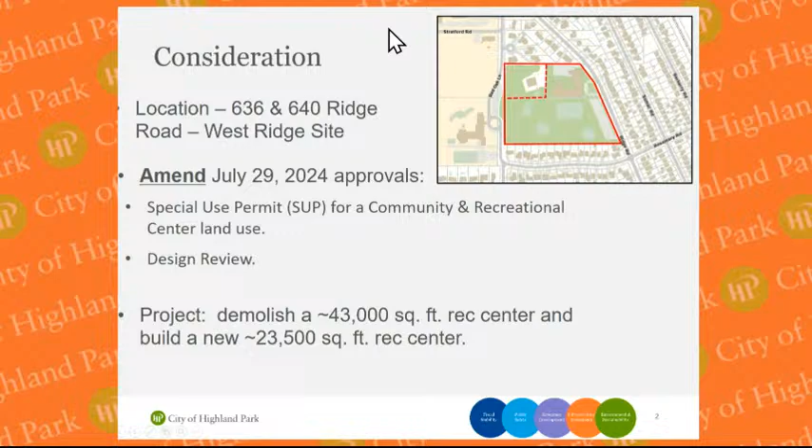There was an approval last July 29th, 2024, for a special use permit for a community and recreational center land use, along with design review. The commission considered this at two of its hearings leading up to that July 29th City Council approval. The project is to demolish the existing 43,000 square foot building on the north side, the rec center on the north, then build a new approximate 23,500 square foot rec center on the south, more towards the southeast section. That was approved last year in July.

Okay, so the applicant, in finalizing their building permit plans, made several changes. So this is an amendment to that special use permit and that design review. I have 3 slides here on the changes.

The first change has to do with the height. This was approved for a height of 27 feet. The proposed is now 30.8 feet, 3.8 feet higher. That is within the PA, the Public Activity Zoning District. This was rezoned to the PA district. That is within the 35 foot height limit. It's just a change to the plans that were approved with the special use permit.

This is a snip from the packet. What's actually increasing in height, it's not the entire building, it's the gymnasium part, which is a sub-footprint of the overall footprint. That is what's increasing in height.

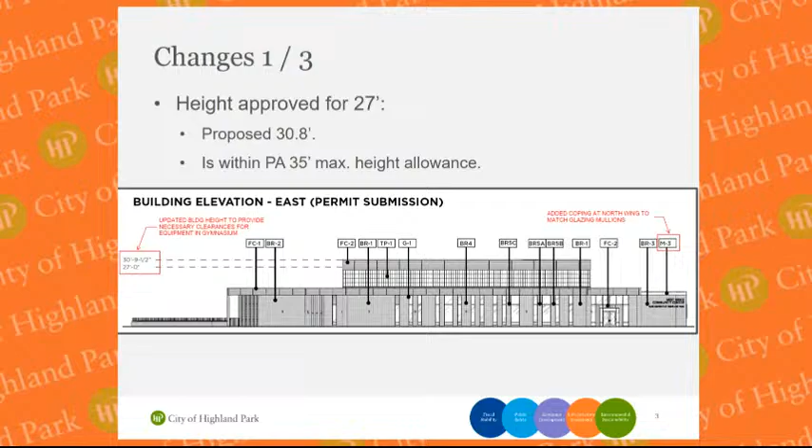I don't believe I have in my presentation the setbacks, though those plans were included in the packet that's posted online. The commission may recall that the building is actually set back considerably from the east property line along Ridge Road and far exceeds the PA zoning district requirement. Again, this is not before the commission because this is a variation. It complies with the PA height limit. This is just higher than what the plans allow for that were approved.

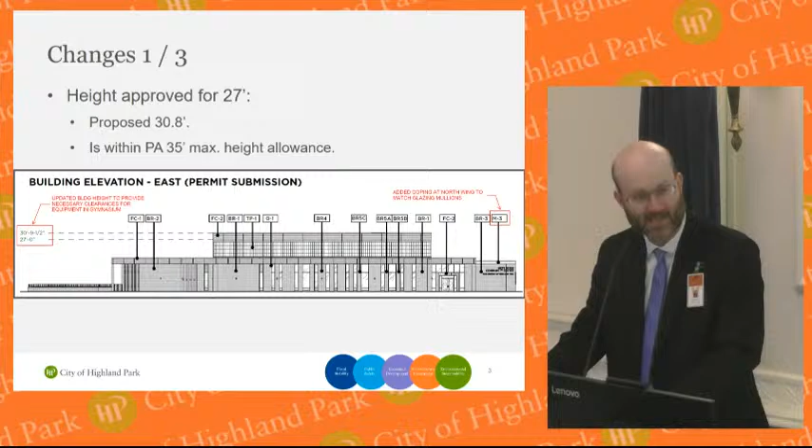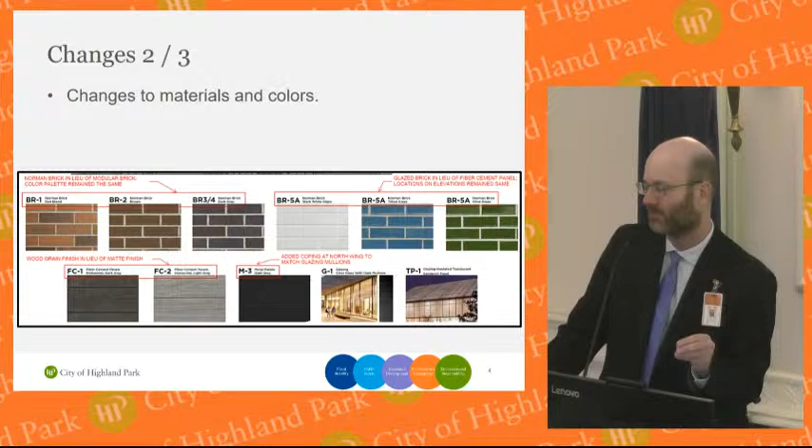There were also some changes made for the materials. This is just one snip I took and put in here. It was an exhibit in the packet where the applicant went through elevation by elevation and had a red box line as to what was changing on each one. If the commission wants me to pull that up, I certainly can, but the entirety was in the packet.

And then number 3, just some bullet points here. There was a traffic circle on the north parking lot. The SUP that was approved last July called for that to be removed. That's actually going to remain. That needs to be there for fire and emergency access.

There's an update to landscaping. That's actually more, they're doing more. They're doing 1 additional shade or ornamental tree and 15 shrubs. That doesn't require commission approval. That's more, that's just back here, just as an FYI to you.

There's also changes to the bollard lighting. They're changing from a wired to solar lighted bollard. Bug rating is 000, that means no uplight, no glare, zeros across the board. And there's 3,000 Kelvin correlated color temperature. That's what the city always encourages and asks for.

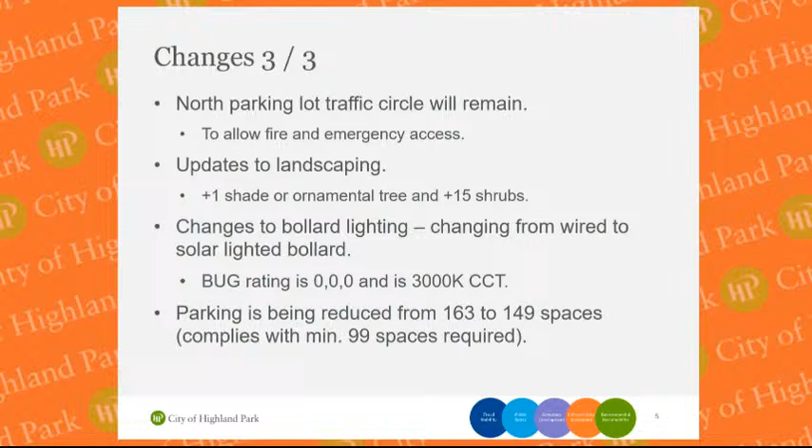That's what's being provided. Parking is also being reduced, but it still well exceeds the 99 minimum spaces that are required. Again, I want to emphasize no variations are requested. This is a change to the final development plans that were approved. The height consideration being number 1, and so that's why this is before the commission.

No public comments have been received. At the request of the applicant, there are findings of fact recommending approval at this meeting that were included in the packet. So if the commission is ready to make a recommendation to approve, that could be done this evening. This is a public hearing, should take testimony from the applicant and take public testimony as appropriate. Thank you.

All right, does the commission have any questions for staff?

Yes, Commissioner Henry. I just had a question about the lighting. Is there any significance other than the change between going with hardwired lights and solar powered lights? I'm just speculating, I imagine the solar powered would be more sustainable because it's powered from the sun, but those bollards are actually set back along. So there's an east parking lot along Ridge Road, and those lights are actually set back along, would be the west curb, so to speak, of the parking lot. So it will still comply with the photometric requirements.

We're presenting all the changes, Commissioner Henry, holistically. Since it's here for the height change, we're just letting the commission know in general all the changes.

I'm not quite clear on the turning circle. Is it, because I couldn't tell from the plans, is it still detached from the other parking lot, or are those going to be combined somehow? That I couldn't tell on the plan. They're connected. So if you're talking about the furthest north parking lot, which to an extent exists today, and then how it goes over to that traffic circle, and then it kind of comes down to a parking lot for that separate building in the northwest quadrant, that they connect, sir.

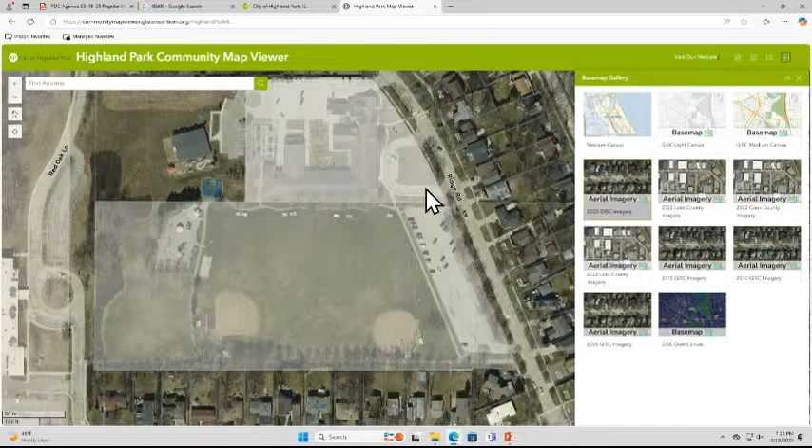Oh no, I think that's being removed. But I think that was always part of the plan from last year as well. Right, this one's being removed, and that was approved last July, and that's still the case today. Forgive me, I didn't know which one we were talking about. No, see, that's why I pulled up the map, that's where I get confused.

Okay, any more questions for staff? Do we have any public questions for staff about this part of the project? Or if the applicant wants to provide testimony. I'm gonna ask them next. Does the applicant wish to provide us some extra testimony?

Hi, good evening, I'm Eric Reisinger with Holabird Root, the architect for the project. Okay, and I will need to swear you in. Do you swear to tell the truth, the whole truth, and nothing but the truth? I do. Thank you, and next, Barbara Dixon.

Landscape architect, do you swear to tell the truth, the whole truth, and nothing but the truth? I do. All right, go ahead.

So I'm happy to answer any questions that might come up, but essentially I think it's been covered very well in the layout. We had bid day savings that were very favorable, so going to some of the glazed brick and change of materiality really added to the benefit of the building for long-term durability.

Great, thank you. Do we have any questions from the public for our applicant? No questions from the public. Do we have any questions for the applicant from our Plan and Design Commission? No, all right. So what we would be looking for here is...

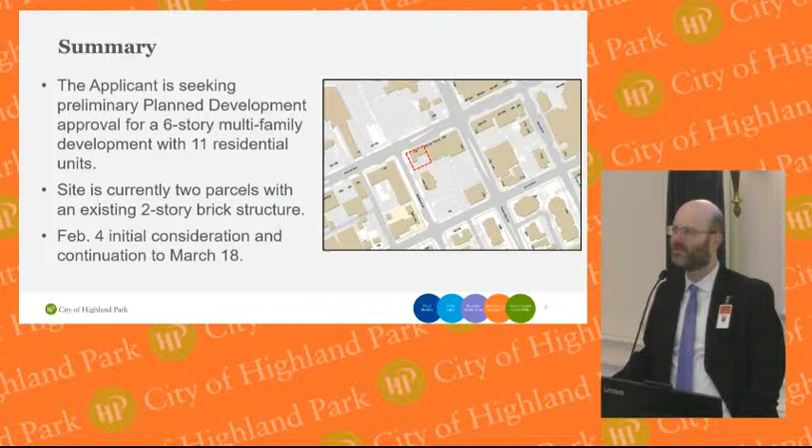That's what PUD is, for a multifamily development at 734 Central Avenue. The applicant is seeking preliminary planned development approval for a 6-story multifamily development with 11 residential units. The site is currently 2 parcels with an existing 2-story brick structure. This was initially considered on February 4th by the Plan and Design Commission, and now we are back as this was continued to today, March 18th.

Okay, so a couple things just to run through. So the applicant submitted a new packet of exhibits with either revisions or just new things.

So I'm just going to run through that briefly. One new item submitted was a narrative on sustainability and resilient design, provided in part to respond to the city's environmental checklist.

The applicant also made changes to renderings and the street elevation exhibit. Additional renderings were provided that included depiction of rooftop structures for what's proposed, and the adjacent bulk of buildings was filled in, in bulk form. I'll just indicate the garage door for this building had changed colors.

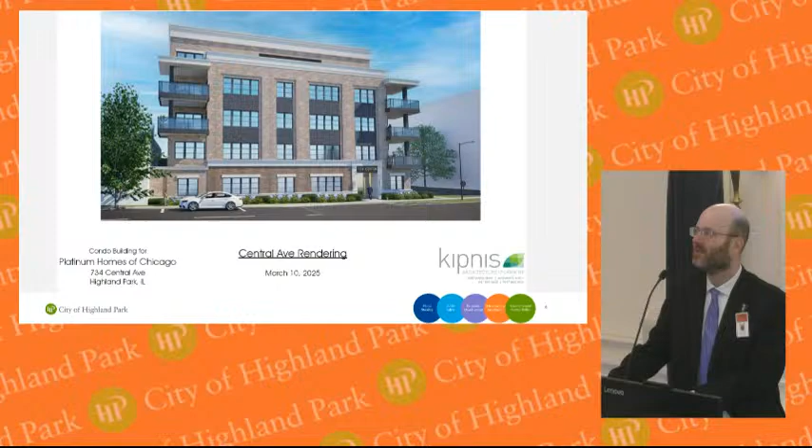I think I put 3 or 4 of these, but the applicant's exhibit had, I think, 8. I'll just run through these real quick. So the applicant added kind of bulk or massing here.

So that's to the west across McGovern. That would be to the east. And this is on Central Avenue looking south at the building that's proposed.

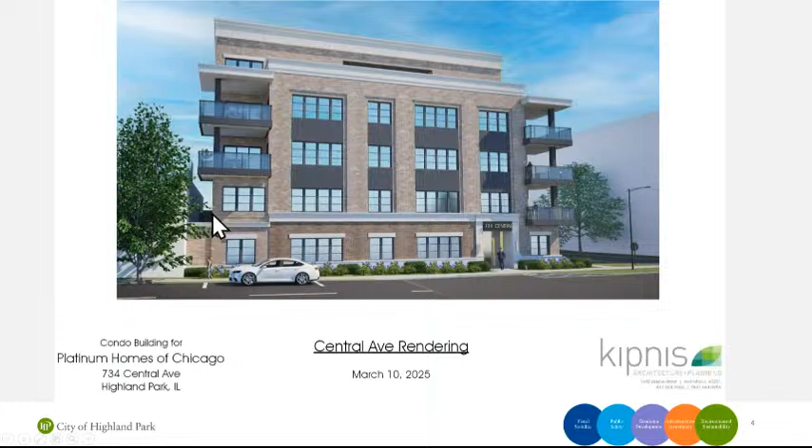I do want to point out that the building goes up to the lot line, a 0 setback here on the first floor for the garage. And then on this side of the building, there's a 5-foot setback running all the way up.

This would be from the northwest looking southeast. Again, the applicant provided this updated rendering, showing bulk or massing of adjacent buildings.

And then this is now on McGovern. This would be if we're on McGovern, looking northeast towards Central.

And then what the applicant did on this side, there's a revision here. There's a 5-foot setback, a ground level 5-foot setback. Of course, when you get back here to this door, this wall is a 0 setback line and runs all the way up. And then here there's a 5-foot setback.

And of course, there's building code implications with that. That's why the applicant laid out the design this way, where you have windows here, and here you do not.

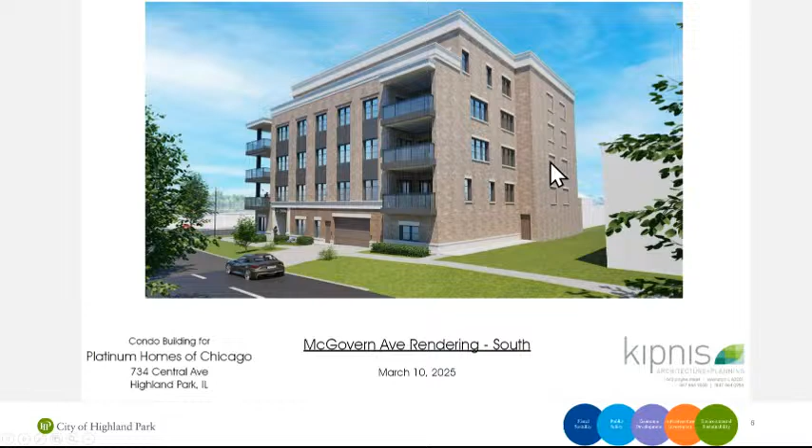And then I think this is the last rendering I took. Like I said, there were 7 or 8 in the packet. This is just an aerial view, or a bird's eye view.

This hopefully gives a better image of the rooftop structures. Because remember, in this district, you can have 4 stories. And so the applicant has a 5th story with 2 residential units that stepped back. And then there are elements of 6th floor stories up here.

Okay, so then for the architectural plans, I'll run through just a few of these real quick after this slide. So there's a turning exhibit for the interior first floor garage that has been provided. That was another comment from the commission from February 4th.

The facade had revisions to it. I just talked about the new 5-foot setback that was added to that south property line.

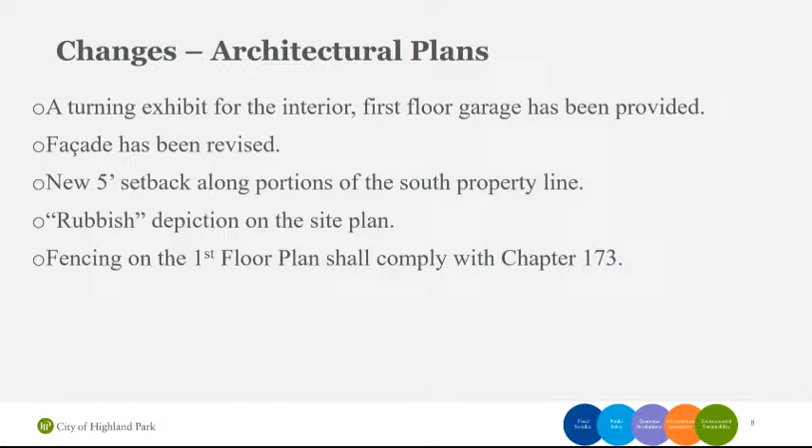There's a rubbish depiction on the site plan along the west. I'll point that out - that'll have to be screened or fenced as appropriate. Also, I believe on the site plan there's going to be fencing on the south property line. Such fencing shall have to comply with Chapter 173 fence requirements.

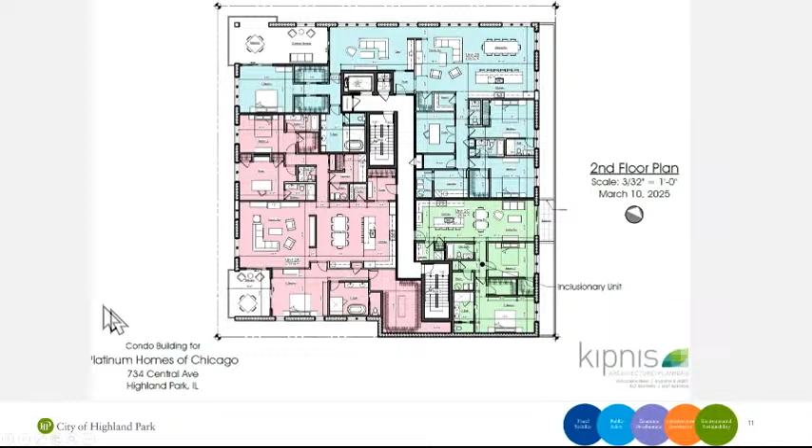On the left is the roof plan that was on February 4th. On the right, the one with red revised, that's the roof plan before the commission now. You'll see that the applicant added rooftop mechanical in these corners, and struck a rooftop stairwell access here.

And you can't read it on this resolution, but you'll see that the applicant modified the elevator. I don't believe there's going to be elevator access at the top - I think it cuts off. It's just like a bulkhead now. So those were the changes to the roof plan.

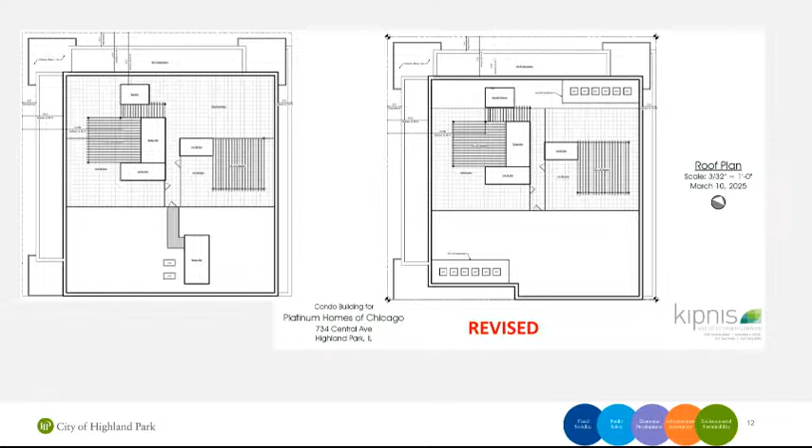So on the roof plan, the applicant depicts AC units. The elevator access to the roof has been removed, but the bulkhead is still modified. One stairwell was removed - that was in the staff report. Any mechanical equipment must comply with the sound regulations.

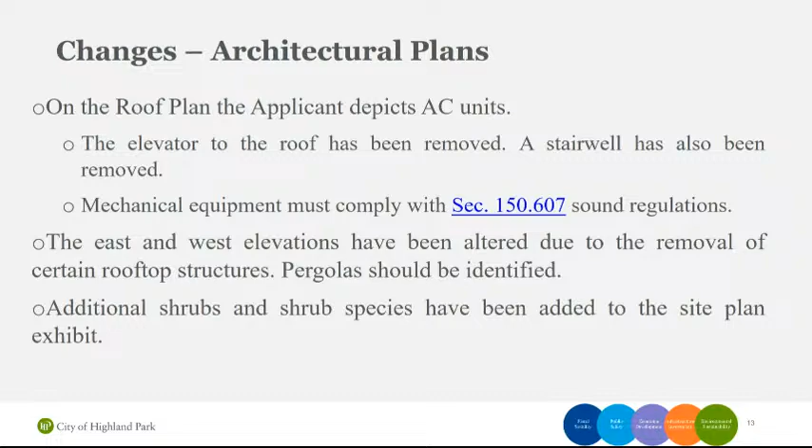Yes, we ran through those landscaping changes, so it was updated. There are 3 different species proposed, and then there was an increase in the shrub count. So the shrub count increased by 26.

Hold on one second. Yeah, so there's no relief needed there. No relief is needed for the shrub count. They're 22 in excess. Now there was talk about the trees, and of course this property, they're doing, in this zoning district, there's the Article 23 overlay.

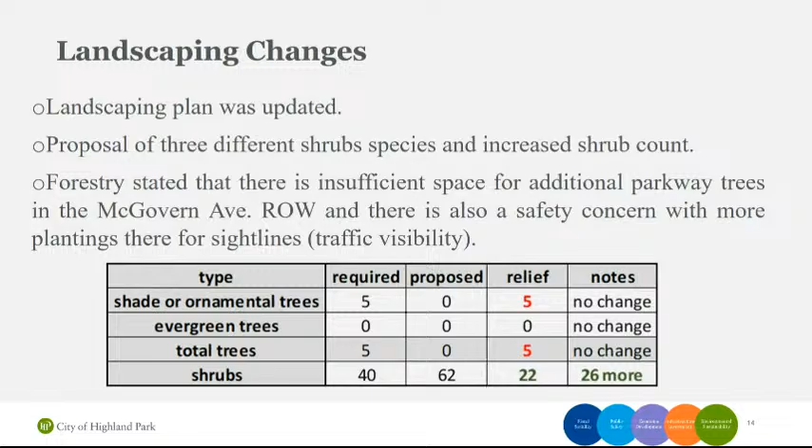And so they actually have to have a setback. It's like that build-to-between zone. And so they're meeting the 5-foot setback. And as they depicted it, those are shrubs, not necessarily room for trees there.

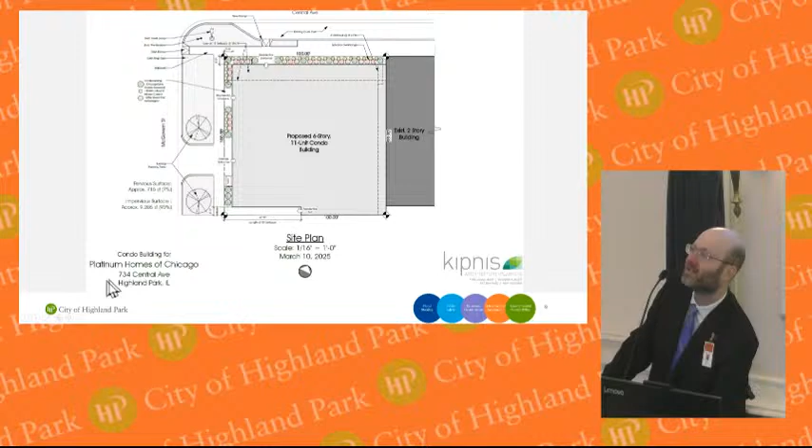And so I know the commission talked about, well, can they put trees to the west in the McGovern right of way, or for any of the right of ways for that matter? Well, we put that question to our city forester, Ben Miller, and I'm paraphrasing him here, but the exact words were in the report. The answer is no. Forestry doesn't support that. There's insufficient space for additional parkway trees, and there would be a concern with putting those trees in there for traffic visibility reasons. So the question was asked, and that's the feedback from our city forester on that.

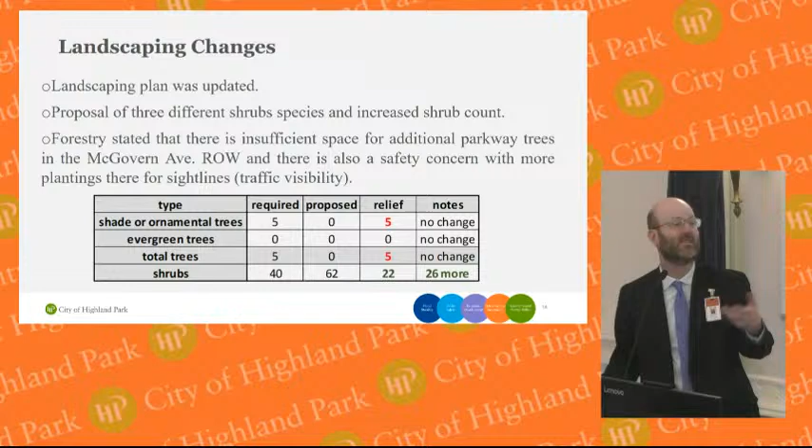So changes to the modifications — I've got 2 slides here. This slide is what's changed for the modifications that are requested. The next slide is what stayed the same, because I still think that's important to remember.

So in terms of height relief, this zoning district allows a maximum of 4 stories and 51 feet. I'll just point out that one of the exhibits, and I apologize, I wasn't able to ask the applicant this in advance, but one of the exhibits was 7 inches different, so the applicant should just clarify if the relief is still 68.5 feet or if it's going to 69 feet.

The stories are the same, but obviously we talked about how what's on the rooftop has been modified, so there's context behind that. There's a modification to section 150.520M for construction to the property line on the east side, the 0 setback. That was relief at the prior meeting as well. I just don't believe that was in the staff report, so we just want to make that clear.

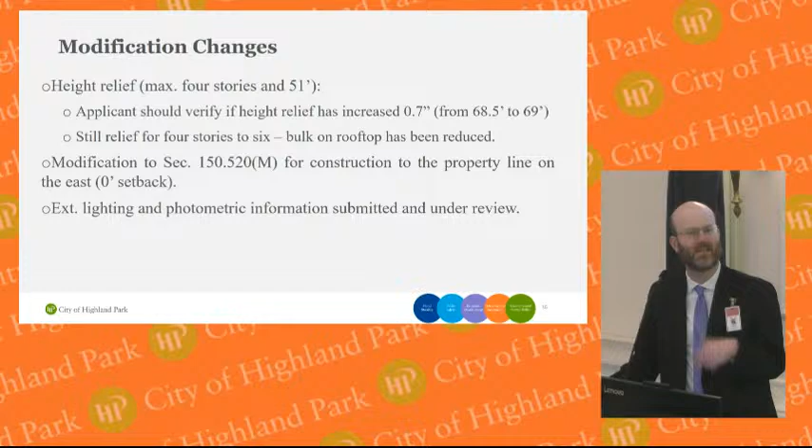There's a PUD requirement where a new building is supposed to be at least 15 feet away from any new or other existing building. And then finally, exterior lighting and photometric information was submitted by the applicant. That came in yesterday, that's still under review. I did distribute that, I will make sure that gets in the packet for next time, and there will be review next time for that.

Okay, and here these are just the modifications in public benefit. There are no changes to this. This is just a reminder to the commission that they're also asking for traffic visibility requirements since this is at a corner. We did discuss that, and we discussed the distance last time.

They still need to verify the transparency and blank wall requirements, though I did see numbering on the photometric plans — perhaps that may respond to that. I just did not have time to completely review that as it came in yesterday. The aforementioned landscaping modification applies for the trees, not for the shrubs, then that response there to that section. And then the public benefit — that's what was proposed, and they did not submit a change to that.

I think I'm almost done with my presentation, just a few more at most. So the Housing Commission — this is an update. The Housing Commission reviewed this preliminary review at its March 5th meeting. 1 inclusionary unit is proposed and $148,320 payment in lieu for the fractional 0.8 required units. There's a little more bulk to this in the report, but long story short, Housing Commission recommended 5-0 in favor, preliminary approval of this inclusionary housing plan. It'll come back again on April 2nd to the Housing Commission.

Oh, that is my presentation. So again, standard recommendation: the commission should consider the changes, take testimony from the applicant, reopen the public hearing and take testimony from residents, and then either continue or direct staff for findings of fact for a future meeting as appropriate. Okay, thank you.

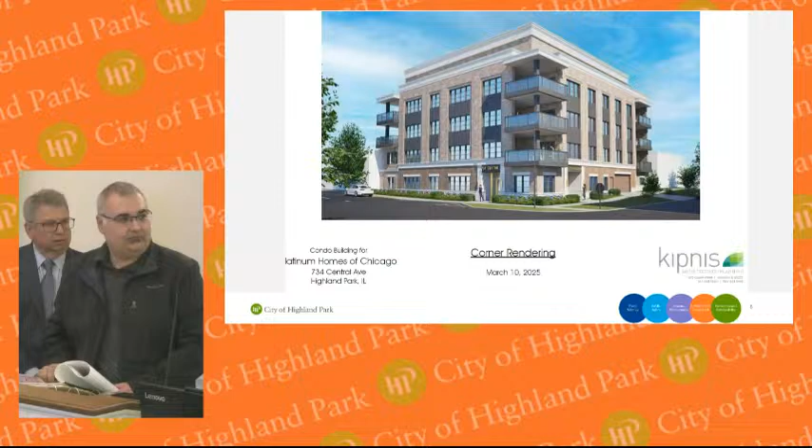Commissioner Imchuk: I have a question about the elevation, the rendering. It looks as though you can't really see anything on the 6th story with the revisions made. Is that true from all angles of the building? It depends on how far you come back, but that perspective is elevated up a little higher, almost at the floor level of the 2nd floor. So we're trying to make it clear that you can't really see a lot of that floor, so it basically reads as a 5-story building from the street, because of that setback.

As mentioned, the only elements on the 6th floor are the deck and the stairwell huts, and I believe there's also a pergola up there. So obviously there's really not a lot of bulk on that 6th floor, it's just for access, basically in the vertical.

I have a question on the stairwell huts. What material are you using for that? In that elevation it shows white, but in other elevations it shows the same as the building material, which could be brick. We haven't talked about that specifically. I'm assuming it will be a masonry material, because that's what's structured underneath to support it. It will be visible at some points, right? If you're driving around the city, you'll be able to see those stairwell huts. If you get far back enough, you probably would, though it would be difficult to see even from across the street on the sidewalk. I'd like to know what that material would be.

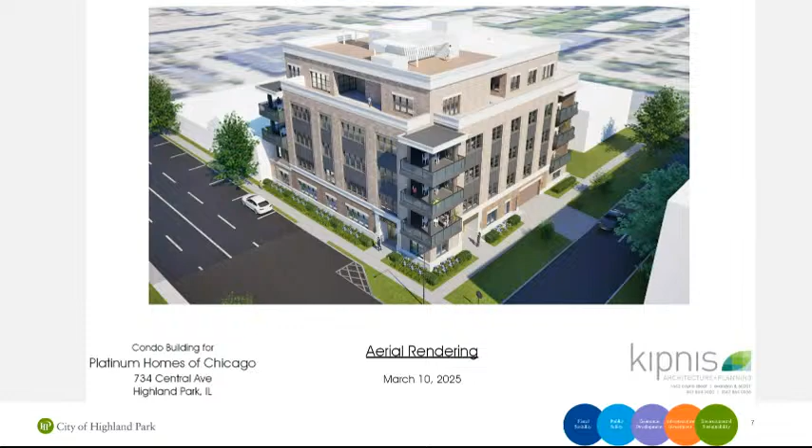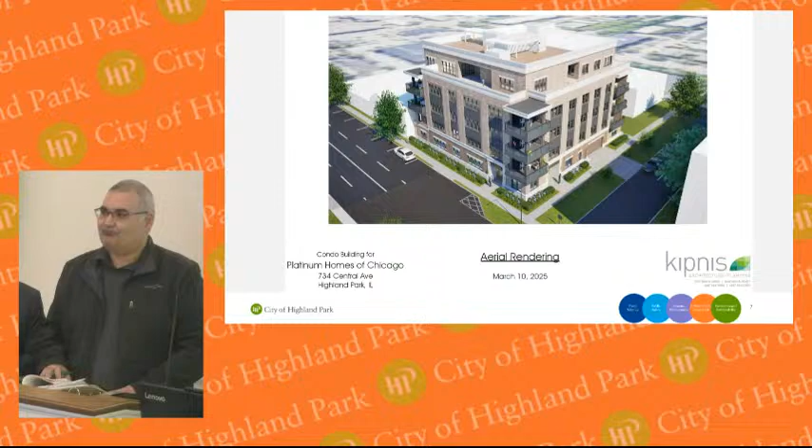I did provide Carl with some brick samples. One of the changes was at the ground level, we added a contrasting brick material. So one of those is the brick for the main building, and the darker one would be what we're proposing for the ground level, just to give a little contrast, and we'd probably have a darker mortar to further emphasize that contrast. Those changes were made in response to comments we received last time from the design division. It anchors the building a little bit better with having that base around the streetscape, or the street elevation.

Mr. Fontaine: I just wanted to point that out. Thank you for that additional variation in the facade bricking. But in terms of the roof and the stairways, is it something you can do in terms of having it clad with the same type of brick as the superstructure above the first floor? I think that makes sense, something the commission might want to see.

Any comments on that comment? Any comments on?

Are you able to comment on the 68 feet 5 inches versus the 69 feet, or do you still have to go back and look at that? We're asking for the 69 just to round that number up, because as you can tell by the rendering, those stairwells aren't fully detailed yet. I want to make sure I have enough room to play with. We might add a cornice or some other detailing that will bring that up a little bit. I think 69 is going to be doable and realistic.

If there were to be additional plantings within McGovern, the forester's concerns were limited to just this parkway to the west. The forester was not in favor of additional plantings there because they stated there was not sufficient room, and that in this area there would be concern for traffic visibility. He was not referring to the building itself.

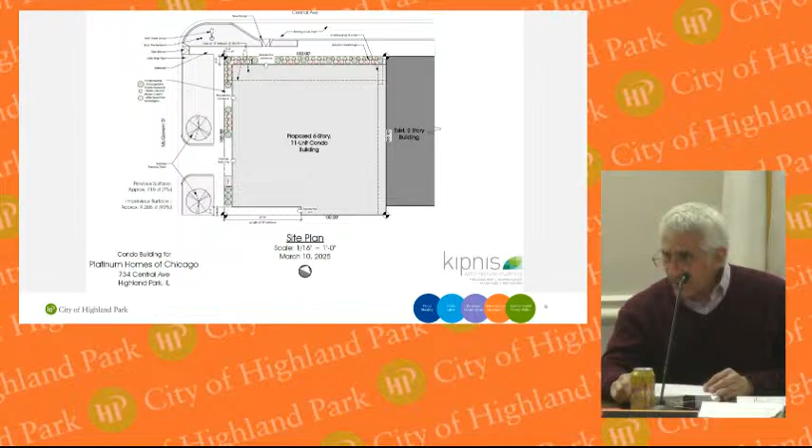Okay, I understand, it was the plantings, not the building. But it's all part and parcel of the development. Yeah, and obviously we're going to comply with the forester's request.

Do we have any comments from the public? Oh yes, sorry, Councilperson Littlewer.

I just want to make sure I have my questions answered, though I'm not sure they'll get answered at the council level. This is actually for staff as well as for the applicant. I'm glad you cleared that up about the forester, Commissioner Henry. But as far as the city engineers and staff, there was no problem with visibility, especially on the north side on Central, at that corner there, where it's a right-hand turn coming out from McGovern to Central. I just wanted to ask about the actual building, not about the plantings, in terms of visibility.

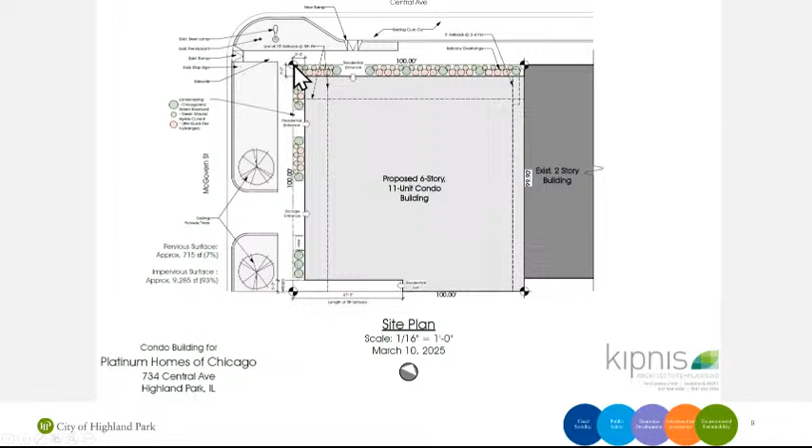Would you like me to respond? I can respond. If I remember correctly, you might have been absent at that meeting - I missed one meeting. So at that meeting, the requirement is a 25 by 25 foot traffic vision triangle, and per code it's measured at the property line, so it'd be 25 feet down here and 25 feet this way. I used the survey as well as GIS.

Now granted, this is not the code requirement, but there's context, right? So we try to look at what makes sense, what's the context. If you use that 25-foot requirement and the curb, it's actually something like 25 or 30 feet here, and down is fine. So if you only use the parkway, the building will not be in that traffic visibility area.

In terms of the engineering division, no, they did not comment on that. I'll add, I actually referred that question to the police department as well, and they did not have comments. Perfect, that's exactly the response I'll need for city council. So that's one.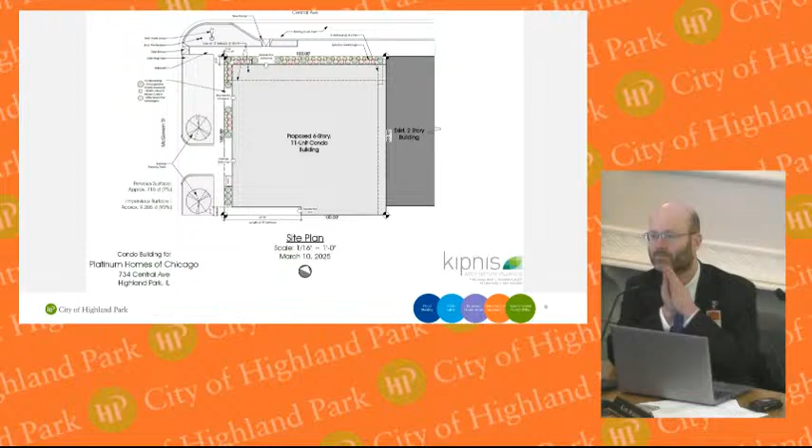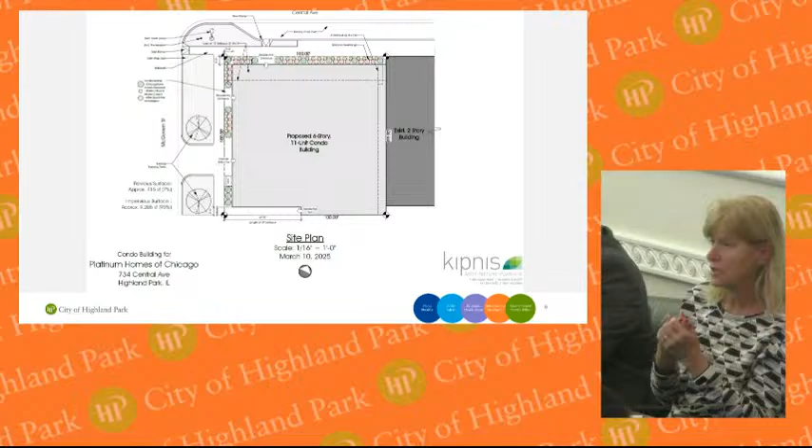The second one was there were several pictures showing the neighboring building, which is about the same height, which alleviated some concerns. But I guess my question is, I didn't see the rest of the neighborhood in the packet, and I'm wondering how that looks as a street, not just as those two buildings. I tried to look at it in the packet, but I'm not sure there was any rendering to that effect.

We have just massing models of the neighboring buildings to the east and the west, I guess, the McGovern house as well, but we don't have them in the elevation. The only study we did was comparing the height to the McGovern house.

We had a discussion at the last meeting with regard to that specific issue. The discussion really involved the fact that the properties to the east are in the B45 zoning district, which allows for 5 stories. So when we discussed this - and the board members can remember - if those properties are redeveloped, they can go to the same height as our building, assuming the lots are not undersized like ours, as a matter of right. They don't have to do it, but correct me if I'm wrong, it's because they'll be governed by the underlying zoning, which is the B45, whereas we were governed by B44 because our lot was undersized. Currently, where Shavitz is and those are 1-story buildings, but if they are redeveloped in the future, they have the ability to go to the same height that we're proposing here.

Perfect answer, thank you very much. I apologize that I didn't have that information. Thank you, I had one more question.

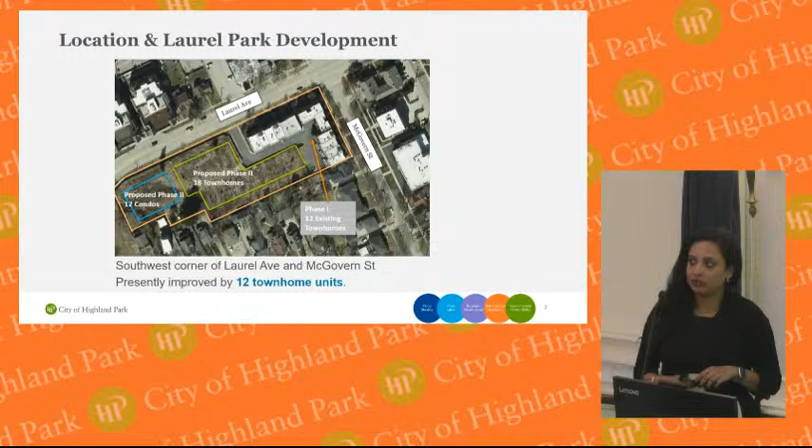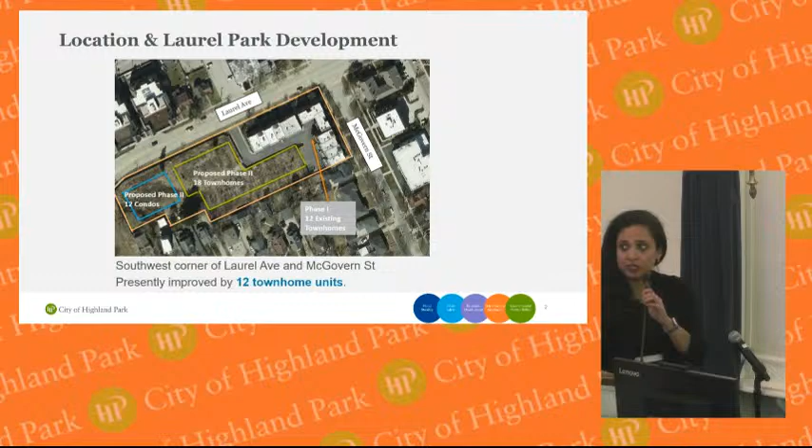So getting into Laurel Park development, where is this located? This is located at the corner of Laurel Avenue and McGovern. Right now we have 12 existing townhomes. This was improved, which you can see as phase 1, which was completed. What's proposed now in phase 2 is 18 townhomes. Can you see that in yellow? So those are the 18 townhomes. If you walk and drive by, if you look through the fence, you will see existing foundations for those 18 townhomes. In addition, they're proposing in phase 2, 12 condominiums on the corner, which is outlined in blue.

So what are the considerations before the Plan and Design Commission? As part of those 12 existing townhomes in the Laurel Park development, in 2006 there was an ordinance number 23-06 which was passed, and a 2006 development agreement. So this needs an amendment to that agreement. It needs a special use permit in nature of a preliminary as well as a final plan development. It requires design review. Of course, the Plan and Design Commission has the final authority. A plat of subdivision, because again, we have those 12 existing townhomes with individual owners, and now we're getting those as part of phase 2, the 18 townhomes and the 12 condominiums.

And it also requires a preliminary and final inclusionary housing plan. Just to give you a heads up, this has already gone to the Housing Commission for a preliminary inclusionary housing plan.

So I'm just going to go into each of the sections. For zoning, we need to bear in mind that as part of the 2006 development agreement and the ordinance that was passed, there were some variations that were already granted. But again, this needs to apply to the present code and the same variations need to be considered. So I'm going to go over the ones that require variation for zoning. The first one is the front yard setback. Presently, they are proposing the same thing. Like I told you, there are existing foundations for the townhomes, nothing is changed, and I believe the footprint is the same.

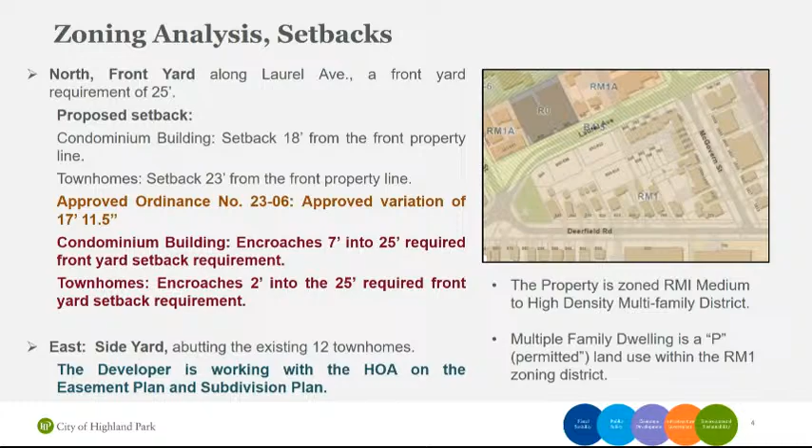I want the developer to confirm that because they are proposing a drive aisle now, and I got a new revised plan yesterday based on the HOA's feedback. So I don't know if the footprint is changing and if those front setbacks are going to remain the same. But for now, I can tell you that whatever was approved as part of 2006, nothing is changing. As for the east side yard, we're going to confirm that. They're working with the HOA and seeing how this is going to be subdivided. Once we get the finalized plan, we will be able to let you know how much that east side setback is. I'm going to show you the site plan.

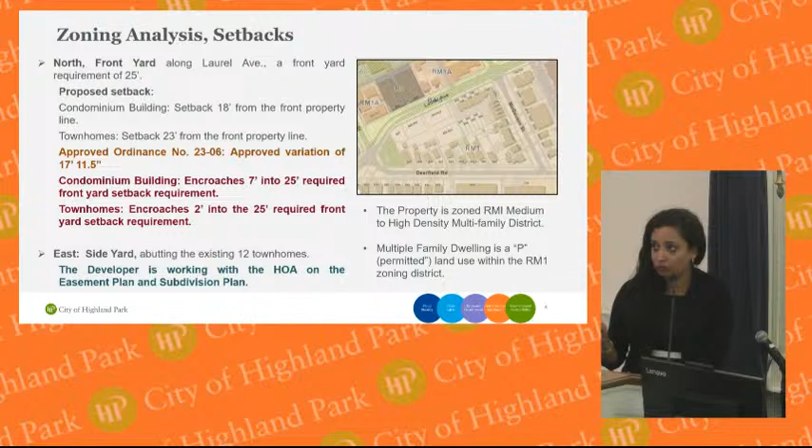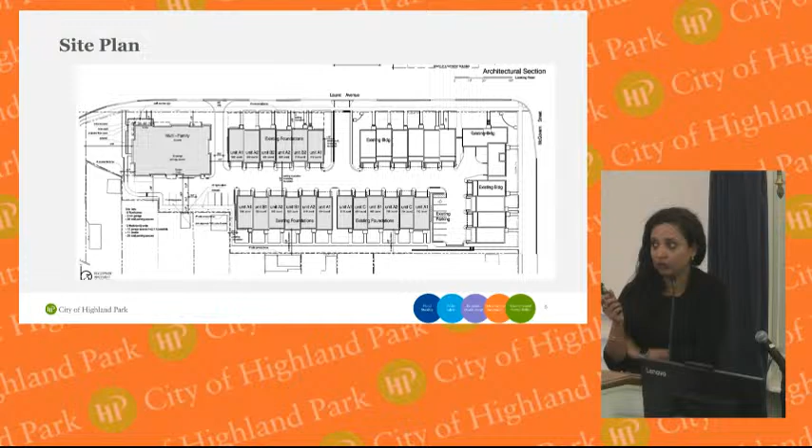So what I'm referencing now is the west and the south meet code. The west is towards Hickory Lane and Laurel Park. The north setback, which is the front setback, requires a variation, and the east, if you look at it, backs up to the existing HOA.

So for zoning analysis for density, if you did see my report, I did mark that it actually required a variation. After discussing with corporate counsel, I just wanted to give you an update that the PUD is considered for the entire lot for density. This was improved by 12 townhomes, but it was approved for a 42-unit development, which comprised of 12 plus 18 townhomes. Those are 30 townhomes and 12 condominiums. So this was approved for 42 units.

Coming to height. What we have here is they're proposing a condominium building of 52 feet in height, and the townhomes are going to be 38 feet in height. If you look at the ordinance and the 2006 development agreement, the approved variation was 39 feet. However, the new variation required is going to be a little bit more, which is 17 feet more.

I'm going to have the developer come up after this and speak, because it's a more contemporary style, and each floor has a larger height, so it amounts to a greater overall height. So this would need a greater variation.

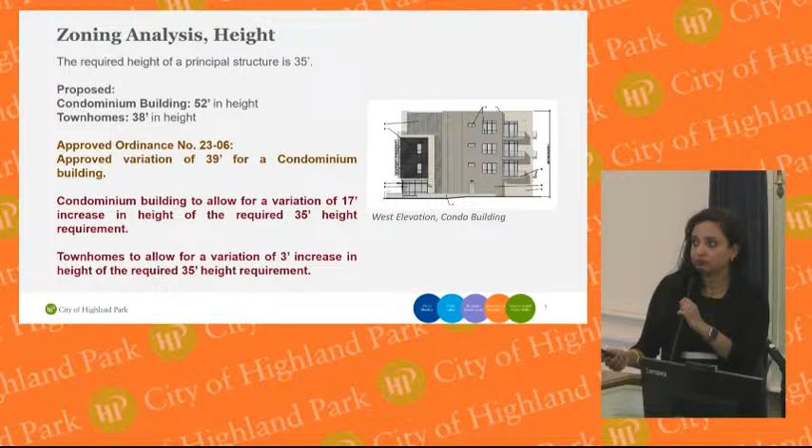And then lot coverage. The lot coverage remains the same compared to whatever was approved as part of 23-06, which will be an 11% increase. However, I want to note again there is a drive aisle that's been added between the condominium building and the townhomes, and that will change the coverage. We received that more recently, so this percentage will increase.

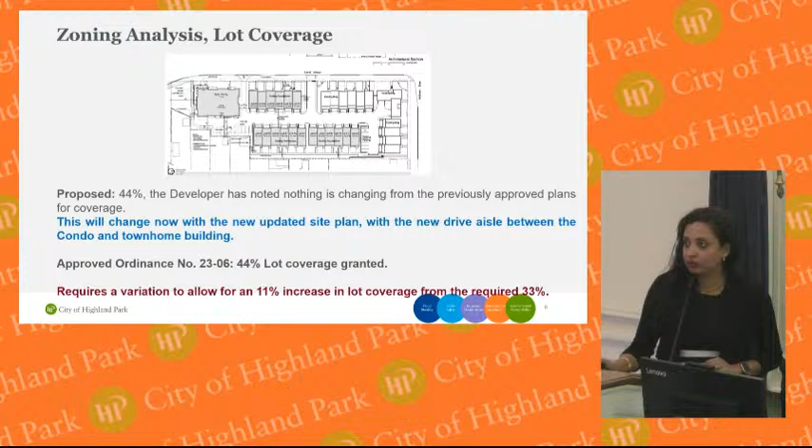Signage. They would need relief for signage as well. This is considered a projecting sign, similar to the one Albion has, if you've seen that. This will be baked into the PUD as a sign package, and as long as it meets the intent of the projecting sign, which needs to be 12 feet above grade and also be artistic in nature, we've confirmed with the developer this is not an illuminated sign.

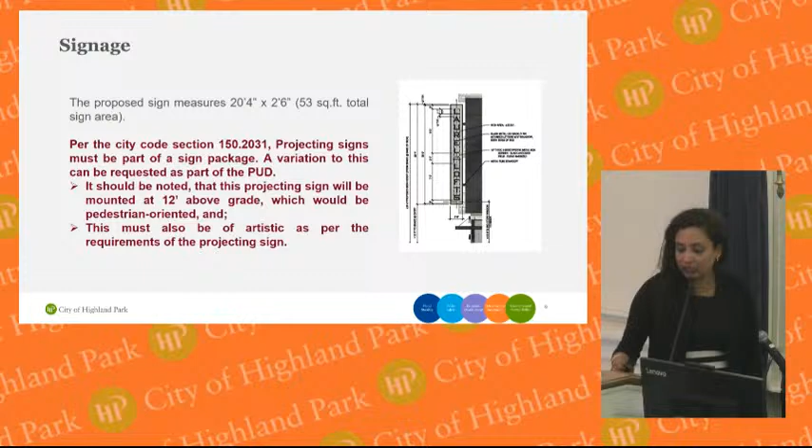Coming to commission meetings, just giving y'all a heads up. Laurel Park Development has come before the Housing Commission twice, and I'll tell you why it went before the Housing Commission, but I want to note it was on February 5th as well as on March 5th.

One of the most significant amendments to the 2006 development agreement includes reducing the required 7 affordable units on site to 4.8. This is why they went before the Housing Commission first, to see if the Housing Commission was okay with this. They are okay with reducing those 7 affordable housing units to 4.8. This took place on February 5th, and I'll get into the details in the subsequent slide.

In addition, this went for a preliminary inclusionary housing plan. So any change from that 7 affordable units to 4.8 would need an amendment to the 2006 development agreement with variation, and there are departures that will be required with the new proposal. But please note the developer is working with staff before this goes for the final inclusionary plan to the Housing Commission on April 2nd.

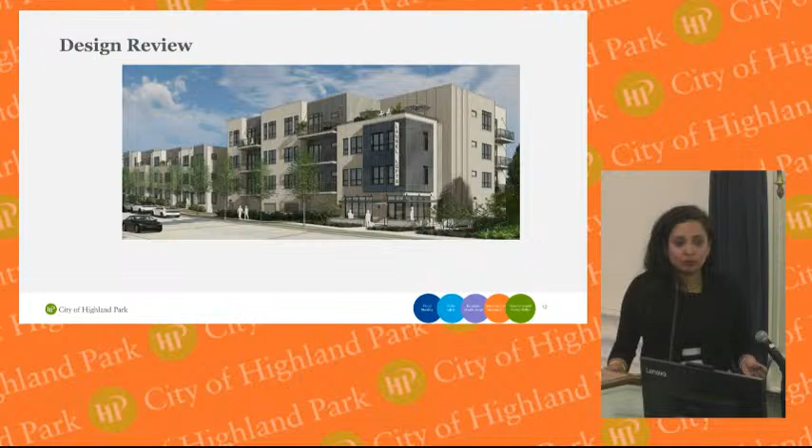Coming to design review, one of the things to note here is this is more of a modernistic contemporary style architecture. Staff looked through the findings, if you see in the report, and didn't find any sort of concerns except when it comes to compatibility with the existing. If you got a chance to drive by and see this, the existing townhomes off of Laurel Avenue are traditional, sort of Greek style with a pitched roof and columns, versus a more contemporary style.

So I leave it to the Plan and Design Commission to see what needs to be done if there is some type of transition that you want to see. But standing alone by what it is, I mean, it meets the design review intent. It's not monotonous, and it has its own character and style.

Oh, thank you for placing that picture up. Yeah.

I just want to note, when I mentioned public comments, there was an attachment, I believe number 16. The developer did meet with the existing HOA of those 12 townhomes on Thursday, March 13th, and they are present here today. Items brought up included congestion within the site, parking, common area maintenance, and construction safety.

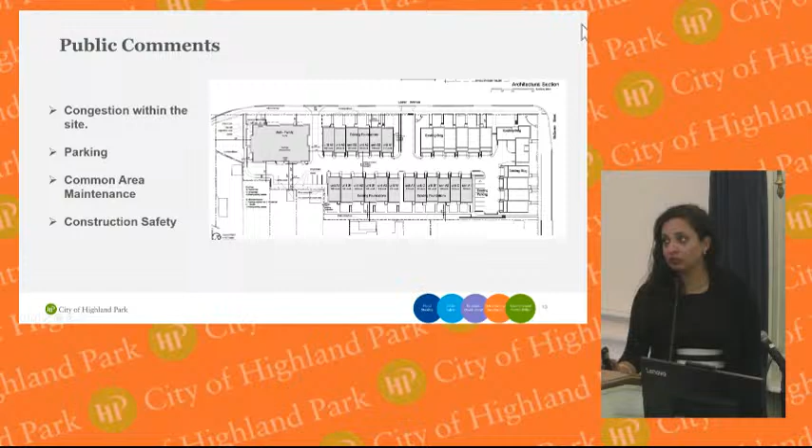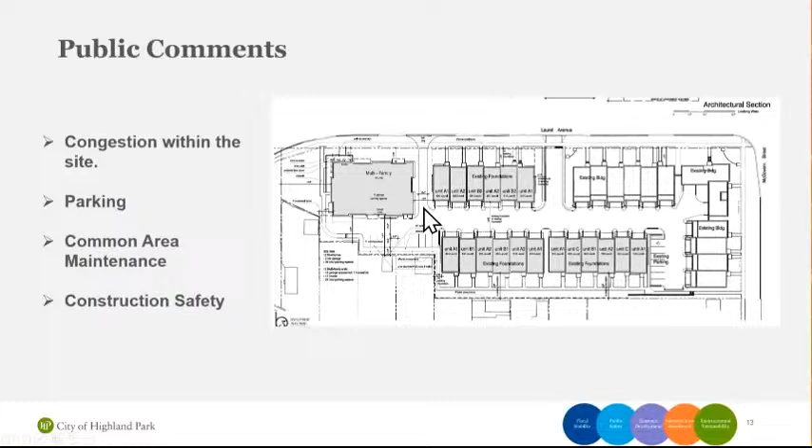So with ingress and egress and congestion, this is the new improved plan the developer submitted recently. You can see the drive aisle between that condominium building and that townhome - I should have highlighted it, but it's right there. Previously, if you see the previous plan in the packet, that was just landscape.

I turn it over to the Plan and Design Commission to open the public hearing and consider the request, continue this project, or direct findings of fact as appropriate. Thank you. Okay, do we have any questions for staff?

Commissioner Henry, go ahead. Are there fewer units ultimately being proposed than there were when this plan was originally approved? No, it's going to be the same. The 2006 development agreement approved 42 units, and it's going to be 42 units. It's presently improved by 12 townhomes, and the developer, as part of phase 2, is proposing 30 units, broken up as 18 townhomes and 12 condominiums.

I'm going back to the inclusionary plan, and I know it's not our purview - frankly, the Housing Commission is one of the only commissions I haven't served on. But there's still time. I find it troubling that the property hasn't changed, it hasn't gotten smaller, the units are the same, and yet the Housing Commission - I'm assuming they haven't voted yet - seemingly is favorable on reducing the number of inclusionary units. I just find that troubling.

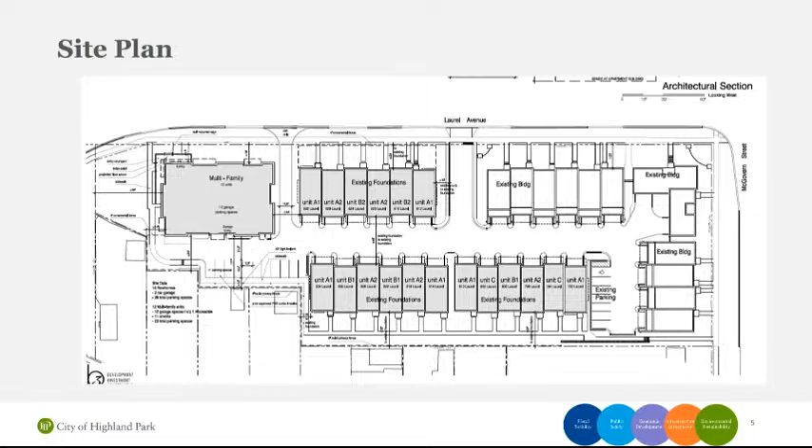Okay, that was my question, because looking at this site plan, I was having a lot of trouble getting to something like 44% coverage if you look at the sidewalks, the drive aisles, the driveways, the buildings. So it's just the buildings and accessory structures, and there are no accessory structures on the site. It's just the primary condominium buildings, the 18 townhomes as part of phase 2, and the existing 12 townhomes.

One small question. I have not looked at a sign package for a multi-family development in the past. There's nothing in the existing ordinance that requires a sign or anything like that. That is simply the applicant requesting a sign, correct? Correct. And this will be baked into the PUD. That's their request, yes.

In terms of signage, sometimes it's commonly confused with just addressing. There are addressing requirements for fire code and things like that for the street number, the homes, and the units, but not a sign like that, no.

Does the commission wish to opine on the design that was here? There was a comment asking whether we wish for this to look a little bit more like the original part of the phase, or are we okay with it looking like something completely different?

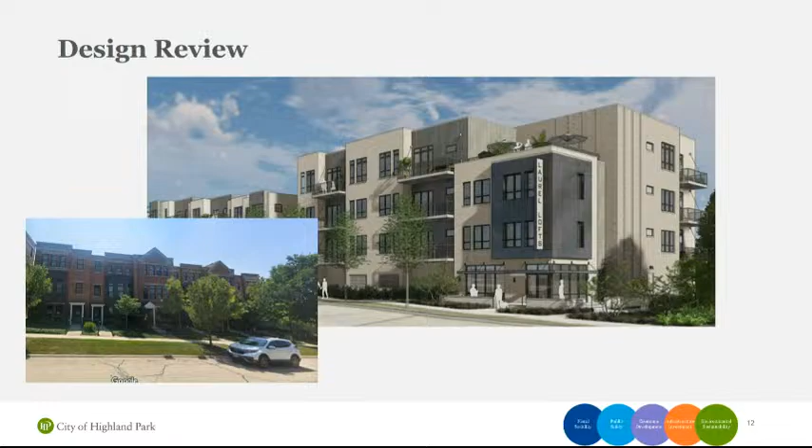I may just comment on that. One thing, and I know it's obvious, but just keep in mind, we are 19 years out. They are two different developments, even though it's one PUD. There's nothing to say that can't be different. You may want it to be similar, and you'd have to think about that, but I just point that out. Or perhaps they could adopt some of the coloration in the new one to tie in better with the old one, just so it fits on the streetscape.

If I may, just briefly, I wanted to revisit and echo something that both Commissioner Kirch and Commissioner Henry had alluded to. I understand and appreciate that a significant portion of this is tied to the inclusionary housing, but as has been stated, that is in the wheelhouse of the Housing Commission. Your purview, what you're going to be focusing on as you make your decision, is going to be the other aspects: the design review, the site plan, the variations, that sort of thing. I just want to make sure you keep that in mind as you hear the applicant's point of view, consider the staff's presentation, and make your decisions.

Any more questions for staff? No more questions for staff. Do the applicant would like to come up?

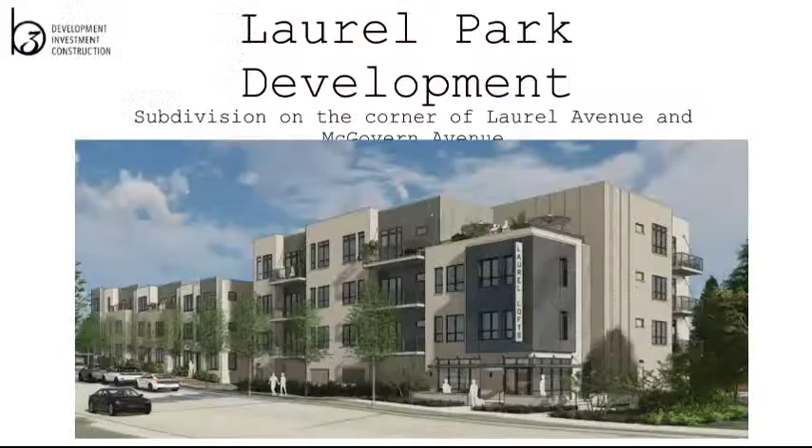First off, thank you so much for having us at this hearing. We're very excited to present our plan to this board. Ultimately, I just want to introduce ourselves. Berger Investment Group, who's currently under contract, is an affiliated entity with B3 Companies and is managed by Simon Berger, who is here today, a real estate developer with significant experience acquiring and completing residential multifamily developments.

Some highlighted projects include Glencoe Estates, a recently purchased and developed 12-acre site in Glencoe that was unsubdivided and has been developed into a 29-residence subdivision; Webster Place, a 14-unit new construction townhome community development in Highwood, Illinois; and Heritage Drive subdivision in Highland Park, where we developed the remaining 6 single-family residential lots and established a new homeowner association after a broken one.

We also recently acquired approximately 36,000 square feet of property in Highland Park off Green Bay Road and Glenview Avenue, and we have a planned unit development application for that project, so you will be seeing us again. Ultimately, our goal is to take over broken projects and, working with the local municipality, take them to completion.

Just to introduce our development team, along with Berger Investment Group, we will be utilizing Kinsey Group as our general contractor at the Estates of Glencoe Development. HKM Architects and Planners, Mark Krinsky is here to present with you, he's the president thereof. And Erickson Engineering Associates, they were the engineering group who worked on the initial 2006 civil engineering plans for this development.

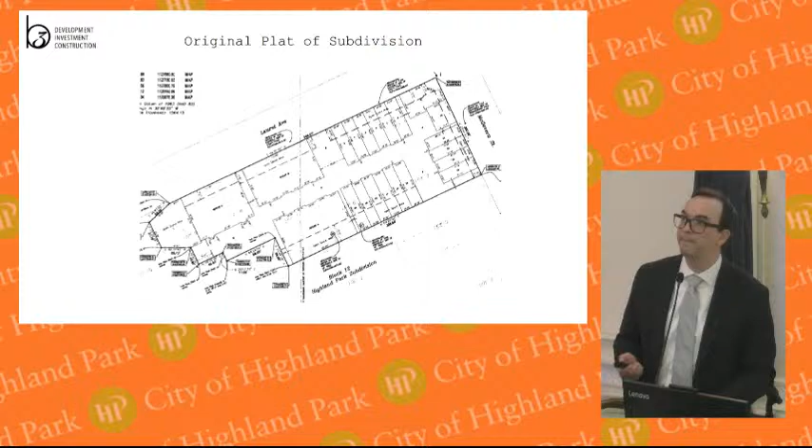That was the original plat of subdivision for the development, and this was an original site plan for the 2006 development.

Per the original development agreement, Laurel Park subdivision was to be completed in multiple phases. As communicated previously, only phase 1 has been completed. So as of today, only 12 out of the 30 townhomes are currently constructed. The undeveloped portion is blocked off by fencing, and concrete foundations that were previously installed for the townhomes are currently in the ground.

It's blocked off, but ultimately, what we plan on doing is assuming the obligations under the development agreement, modified as per our request as listed by staff, and completing this project as originally approved.

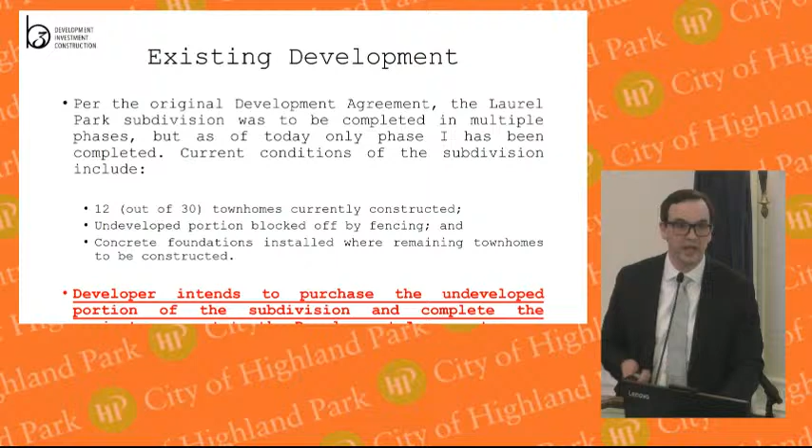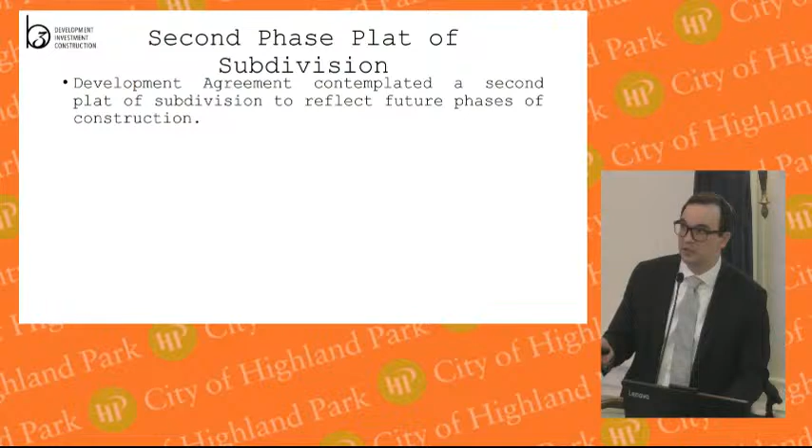Our second phase, the development agreement contemplated a second plat of subdivision to reflect future phases of construction. This would be our proposed initial plat of subdivision for the second phase.

Initially, with our initial submission, we submitted a site plan that was more in line with the original site plan, with modification to account for modern design and updated construction. This was what was originally submitted.

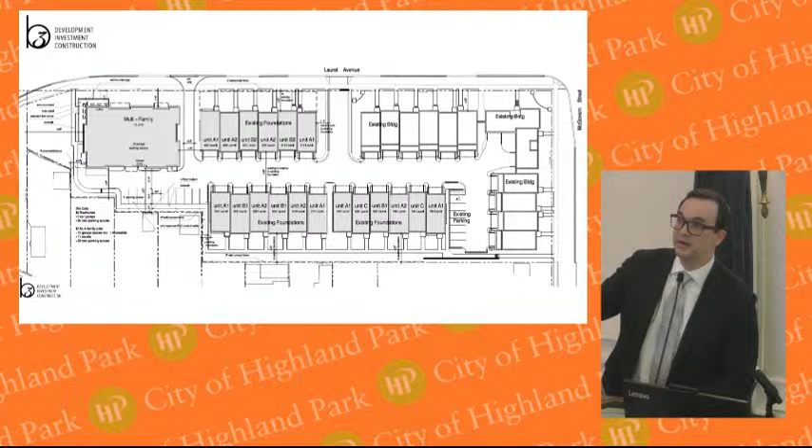However, after submitting, we've been working with staff and we've been in communications with staff and with the existing HOA. I believe there are members in the audience who will wish to speak to this tonight about this project. We've updated the site plan to address some of the comments we received, specifically, as highlighted before, adding the drive aisle between the condominium building and the western townhomes up along Laurel Avenue. This would be egress only, and it would address, we believe, a lot of concerns regarding congestion within the park.

I now hand this off to Mark Krinsky to talk really about our architectural design and design specifications for the site.

This one. Yeah, let's do it back. Perfect. Good evening.

So we got a call a while ago, said, would you like to work on the project in Highland Park? We said, which parcel? They said the one on Laurel. We said, again, because we've looked at this over the years as everybody else has, what a great opportunity to finally get rid of that fence that's been up forever. And then the team said, yeah, there's a caveat.

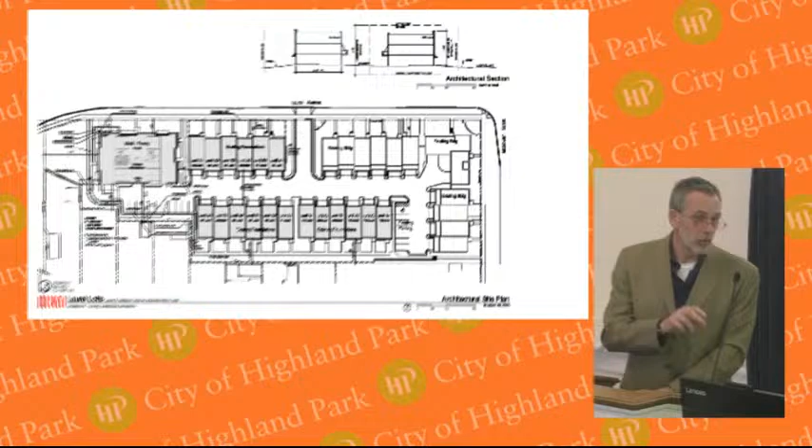I know inclusionary zoning is not part of this. We showed them we've got 12 units in there. By inclusionary standards, we're supposed to have two 2-bedrooms and two 3-bedrooms. They said, well, can you do something better? We showed them, they said, can you do all 3s and maybe give us a 4? We showed them all 3-bedrooms and a 4-bedroom. They said, oh, maybe now we don't like the 4 - maybe it could be a really large living room instead. We're trying to work with everybody.

But we have a lot of constraints here as well, so that's where we are. You can literally see this clicking back and forth - that's the difference on the plan. It may be really small on the plan, but I think it's going to mean a lot to these people here, or at least we hope so. It may not be exactly everything they want, but we're trying.

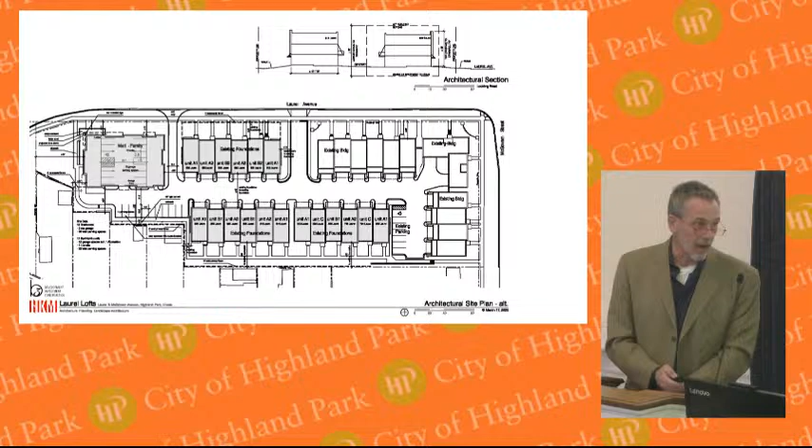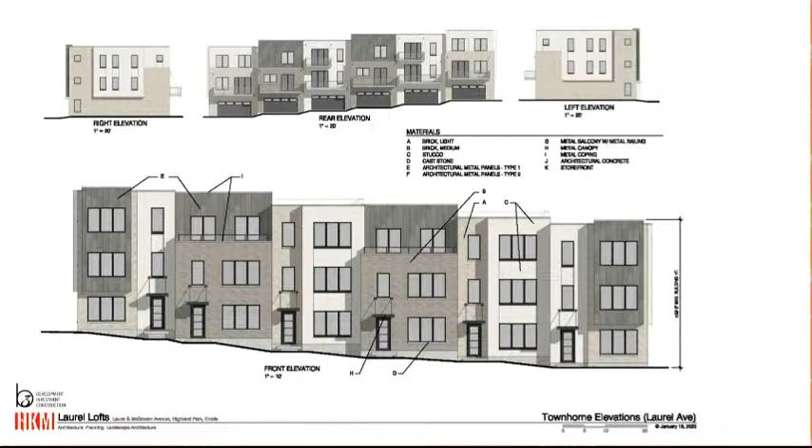So then it came to the architecture. Where we started with the architecture was the existing footprints, the existing foundations, and those existing steps that are going on. We looked at your design guidelines, your urban design guidelines, which actually don't apply to this lot - they apply to the north side of the street, but not the south side. But ironically, there's a photograph in those guidelines of your homes here, because it's a good example on Laurel Avenue.

So what do we want to do? We want to use rich materials. We have a flat roof, it's a modern design. We have rich materials, we have two different bricks, we have a metal panel system. We have a box back there, and my partner Eden would be happy to bring it up and pass it around if the time is right.

We have real stucco, but look at where we started. If you look at the original buildings, those were treated as individual units, true row homes, not treated as a horizontal massing. They were treated as vertical individual units, and that works really well as the buildings step down the site. That's what we're doing here.

If you look at your design guidelines, what you really don't want is a flat plane. So we had a benefit because the footprints in the ground now step forward and back, but we played on that even more. We've got some metal panels - if you look at the far left of the building, that's a metal panel, 2-story box that sticks out, so we're really trying to break up that verticality and create these neat little accents.

To further it, on the second building, the 4th, there's a little railing up there. We've added a little porch on the Laurel units to break up that vertical facade. We're real excited about this because we think it really complies with the character of the design standards, and we also think it fits within the neighborhood.

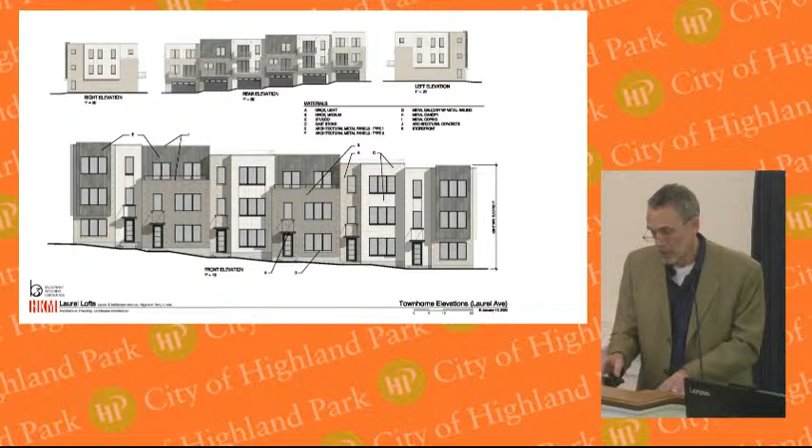So the back units - ignore the sign for the moment - but there's the materials, and we've got samples there. They're all rich materials. In-house, in the office, we're calling this sort of a Lincoln Park modern. If you drive by and see the richness of the materials, it's all about the richness of materials and the proportions and scale of all those components as they go together.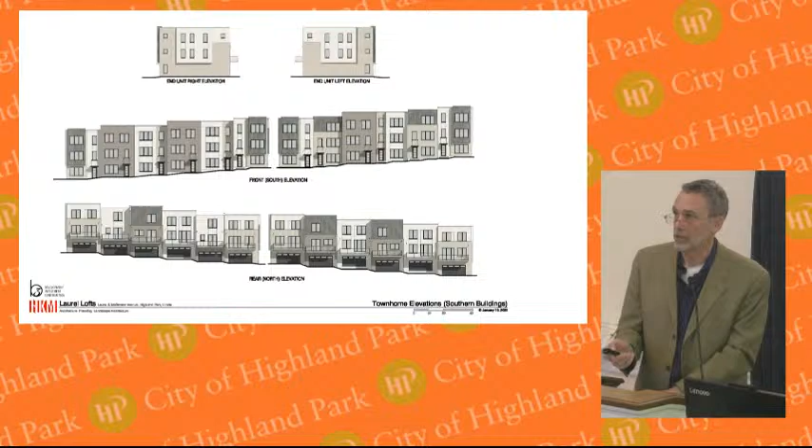We designed this second, okay, because this is the building where we had a little more flexibility. We didn't have a foundation in the ground, so we had an opportunity.

If you look at your design guidelines, we're not a corner lot, but we're pretty much a corner lot, because you come in and hit Deerfield and start coming along - you've got that park there, the public park, then we've got our open space for this lot, and you can really see this as you're coming around that corner and coming up the hill.

So what we did was treat that as the corner. That whole dark gray is a panel, one type of metal panel, and that's where we put the sign, which we can have a conversation about, but we think it's really fun, and it's pretty urban in character.

But we also took square footage out of the building, because that third floor - if you notice, we just took the whole 3rd floor out. So we lost for-sale square footage because we thought it was better for the whole project. Otherwise it could have been the full mass, and if you look at the old plans, it was a very symmetrical building, entry off the middle and the like.

So it's the same materials. Here, we're still treating that verticality, but a little less strong, because ironically, obviously the units - everybody's on a horizontal plane. 4-sided architecture, we've got different sized balconies. We're also not afraid, and it's actually a relief from our standpoint, to have some blank walls for a change.

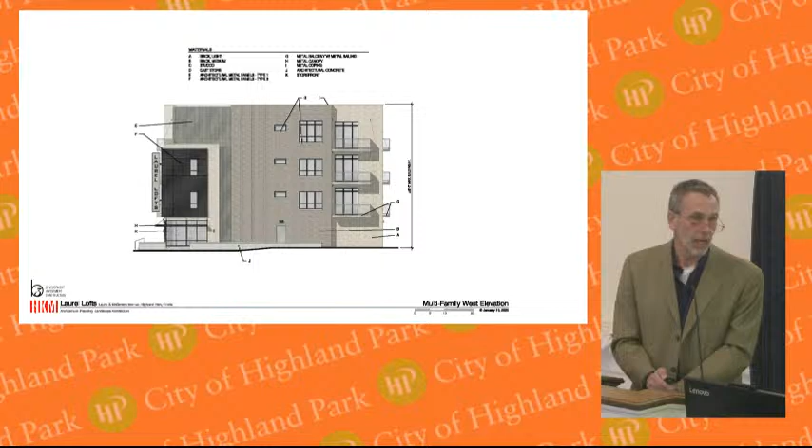Another side—this one actually faces the park. You can see we have balconies on 3 sides. We purposely didn't put balconies on the 4th side, the east side, because that was the one closest to the townhomes. Now, we may be 9 feet further away, but we still think that's probably the right approach.

Same materials—there's the Laurel Lofts. We think that if you measure the box of the letters themselves, that complies with the code. Although if you look at the code housing, I think we need a height variation because it's higher. But we think it really enhances the whole project.

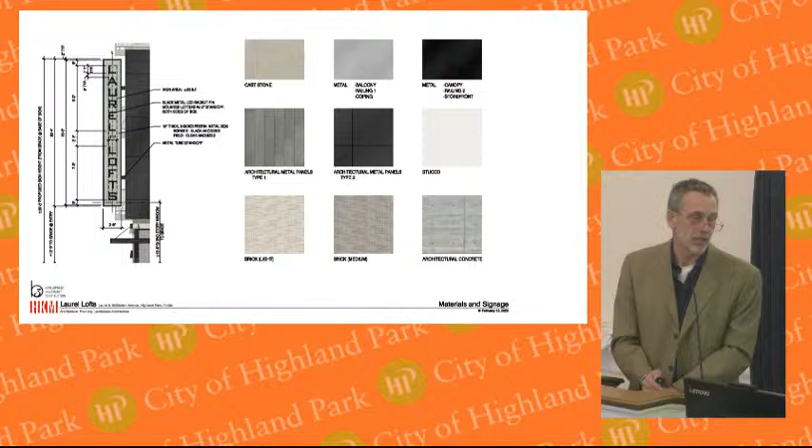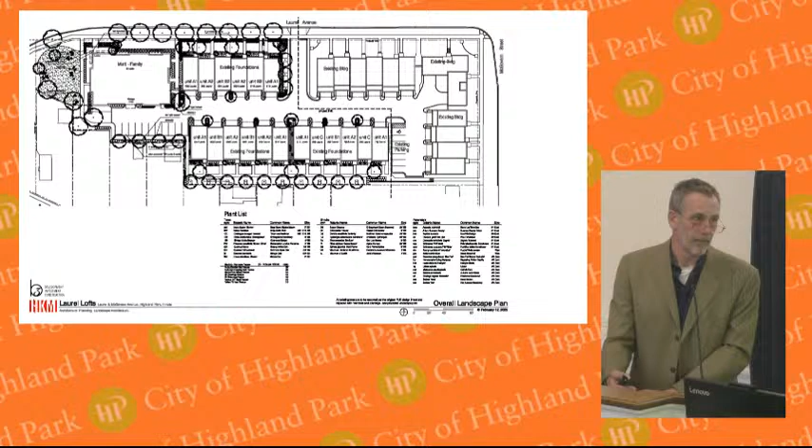Other than changing the plant palette, there's the same richness and strength, but it's now relating to the architecture—with details and plants called out.

The other thing is, to the upper left, there's a big natural area—that's actually where the existing stormwater management system is underground. There we want to do non-mow grasses; people call them pollinator gardens and things like that, but the idea is we can do that there. Now, we may lose 9 feet of it if we agree to create that exit road, but that's what it is.

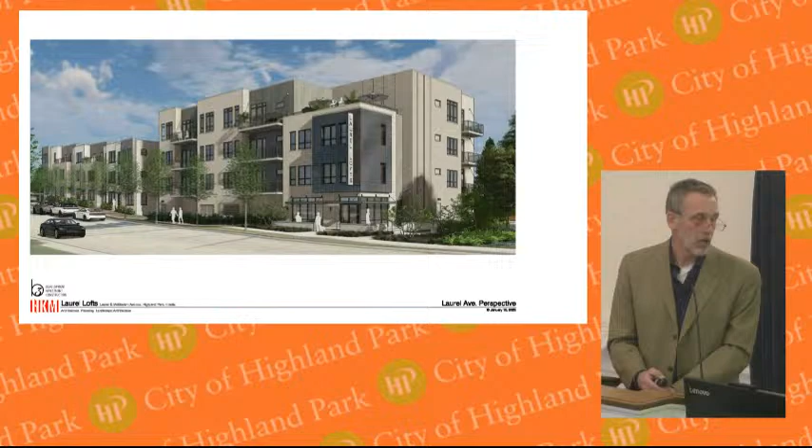That's basically the overall picture of what we've got. We have other slides and samples, and we can get into the details on why we're asking for relief on parking. There are a couple of changes we made because when we looked at the prior approved plan, we didn't think the parking functioned well. So we took one stall out of the outside parking—there were 12 below the condo building, and now there's 11. I can get into the weeds on that if you'd like, but at some point we'd also like to hear from the audience and any of the petitioners.

I'm going to try and be quiet now.

All right, do we have any questions from the commission for the applicant?

The inclusionary housing, we touched on the parking. But most importantly, I went to the fire department and had a discussion with the chief of the fire department. He and I reviewed this exact slide. He is unsure that the current equipment that the fire department owns would be able to get into this development with the current ingress and egress, of which there is only one. He's not sure that the hook and ladder would be able to make the turns in either direction. Furthermore, he doesn't understand how this could have been approved in 2006 with only one entrance and exit.

We discussed the opportunity of putting another entrance and exit in one of 3 locations. So I'm hoping that there's a representative of the fire department here or someone in the planning department that looks at these items. They will, and we've always, in any plan that comes through here that's large enough, we do require the fire department to look at it and provide a turn-by-turn plan for us. Furthermore, we share your concerns about the inclusionary housing.

We share your concerns about the foundations that are there that are 19 years old. We share your concerns about the inclusionary housing all being in the one building and not in the independent housing. We share your concerns and the fire chief's regarding the ingress and egress. We are not interested in one in and out. That doesn't fit what we believe for this type of residential development.

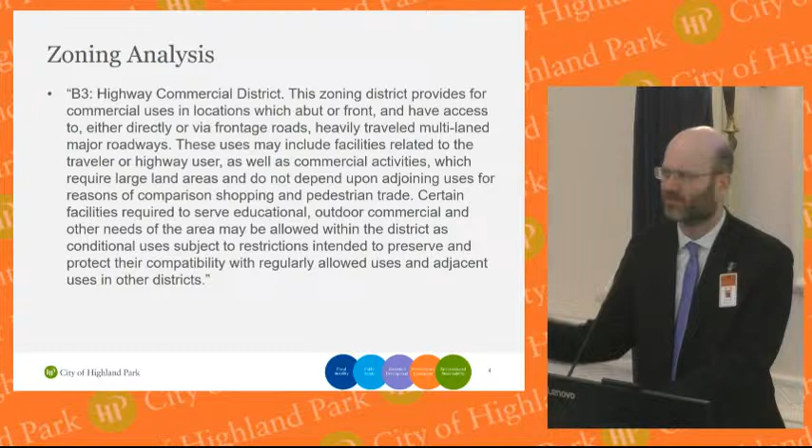I'm not going to read this, it was in the staff report. This was the B3 highway commercial definition from the zoning code, and this was the I light industrial district. I can put them up there and read through them if requested, but they were in the staff report.

Zoning analysis: staff reached out to the Highland Park Police Department. This was in the staff report, and our police department says they use local towing services. Towing services must be able to be on scene within 30 minutes or less, therefore proximity is an important consideration. Crash scenes must be cleared as soon as possible. Our police department indicated they use a rotation of 3 to 4 local Highland Park-based towing services.

Those towing services that are utilized by the police department must submit an annual request and are reviewed by the police. That's not to suggest all towing services have to submit to the police, but those that are called by the police do have to be reviewed. The towing services used by the police have been approved as accessory uses to a principal use.

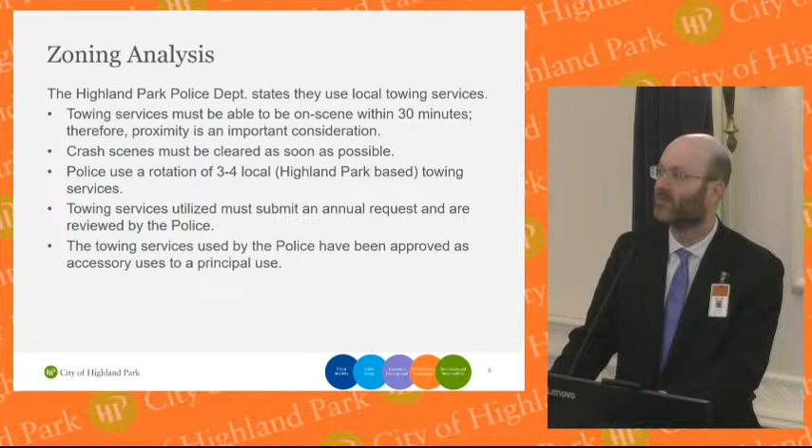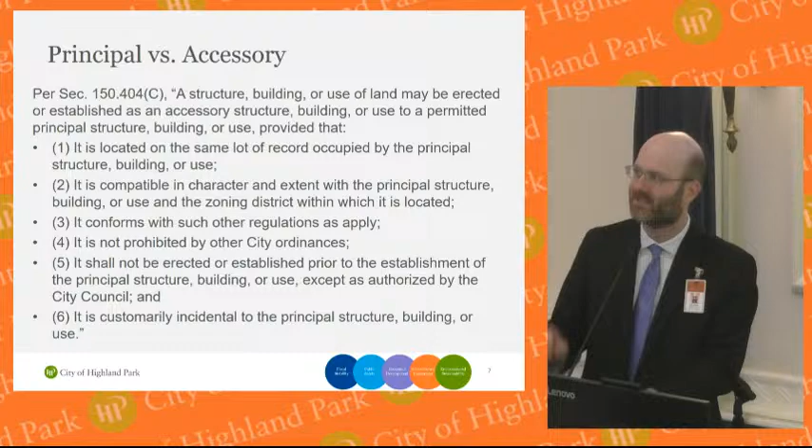That gets me into the distinction between principal versus accessory. There currently are towing services in the city. In fact, we had a table—I think my next slide, which is my last slide, is a table of those uses. Those uses are accessory to a principal use, usually a repair shop. Car gets damaged, you've got to tow it, and then it gets repaired. But that's different than if it's a principal use.

Oh, and I should add one more thing, my apologies. There is something that I kind of prepared as findings of fact in case the commission was ready to make an adoption today. I do want to add that, thank you. All right, does the commission have any questions for staff?

Commissioner Anchuk—oh, go ahead. I just had a comment to make, if that's okay. So we're saying, look, a person's come to us saying, hey, this is a principal use I'd like to do. We have these in the city, but they're accessory, and we don't have it in the use table.

So it could just be, no, it's just not allowed. Or, as we had brought it to you and to the council, is this considered similar to this use that Carl's put up here, which is the open storage yard? We think that the open storage yard use, because it's a conditional use in the B3 and I districts, which seem to be appropriate districts for such uses, would provide enough controls to judge the specific location—is it appropriate? And to allow the council, the commission, and council to put reasonable conditions that would involve screening and such. So that's the consideration before you.

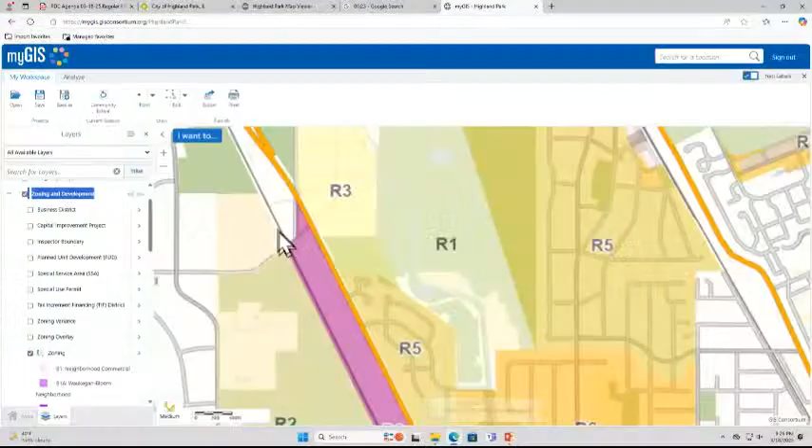Any more discussion while we're waiting for B3 to pull up? So B3 is basically the Skokie Highway corridor? Yeah, let me start from the north. It follows Highway 41, shown in purple, between the train right-of-way and the highway right-of-way. Remember, if it ends up in certain locations, it'll trigger a PUD per prior policy considerations. Then it flips to the other side, with the dealership, near Park Avenue West, where the former Staples, now Dinks, is, and the dealership's over there. And then the I district goes right down all the way, right?

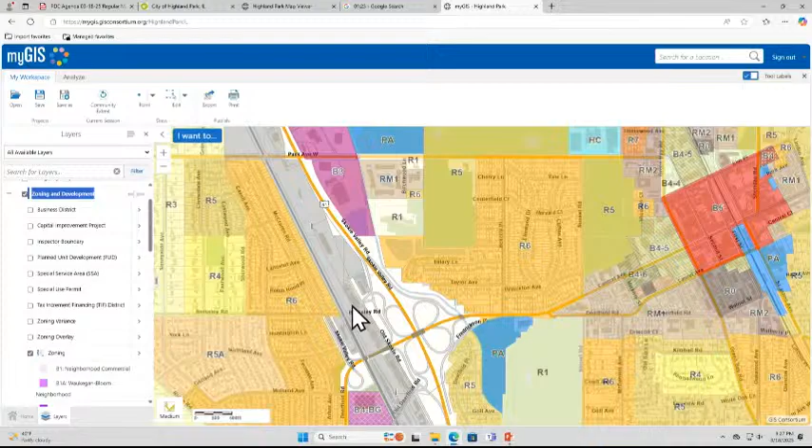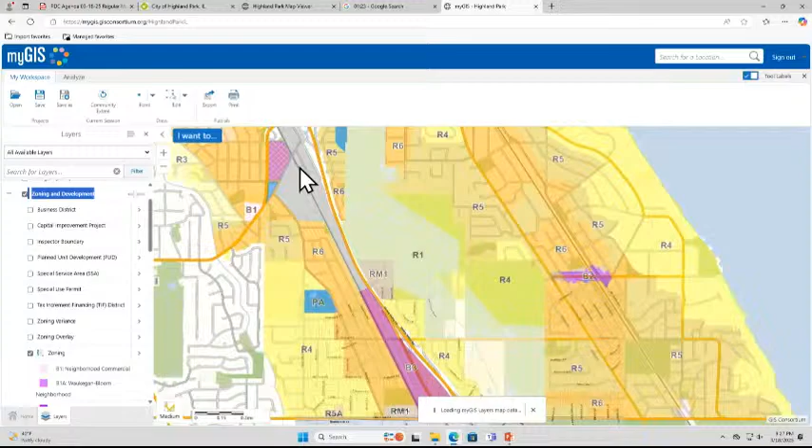Yes, so look up, and then B3 starts again at the Crossroads. Correct. Okay, so if there's no more discussion, can you call the roll, please, Joel? I think we need to call the roll for this one, right? Yes, you do. Did you want more discussion, or no? I don't think there's any more discussion.

Sure. Commissioner Incheck, aye. Commissioner Fatner, aye. Commissioner Nanis, aye. Commissioner Henry, aye. Commissioner Mantis, aye. Vice Chair Kirsch, aye. Chair Moore, aye. The ayes have it, the motion carries.

This item is recommended to council for consideration, as it is a similar use. Thank you very much. And like you said, should we get anyone interested in doing this, they will be back for a conditional use permit before this body and on to council as well. All right, thank you, take care.

On to other business. Do we have an administrative design review update? No, there are none.

Our next regular meeting will be held on April 1st, 2025, and it will be a special meeting at the Marine at 1201 Park Avenue West, Highland Park. Do not be confused as I was. It is not the Moraine Hotel or the Hotel Moraine in Highland. This is the rec center, senior center, former country club location where we have met previously.